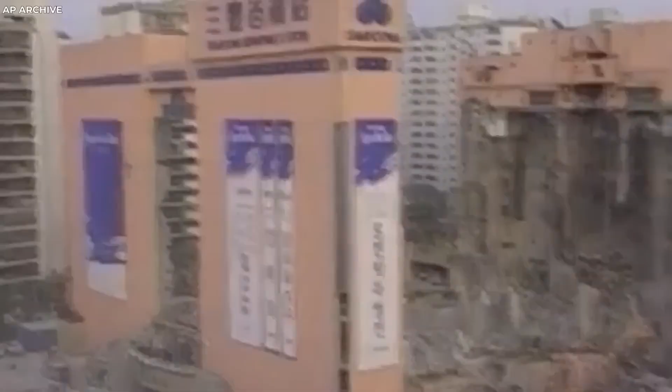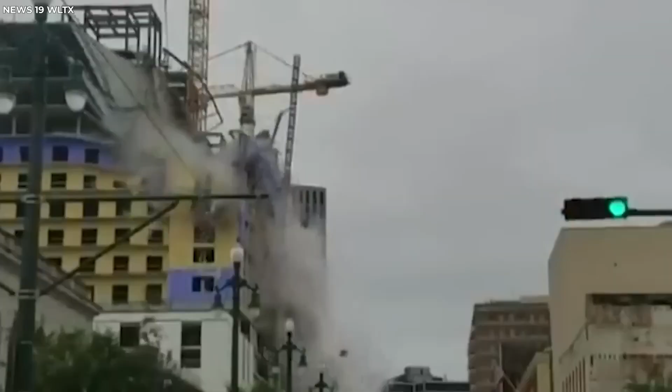What if the buildings we trust most were ticking time bombs? From luxury towers that shattered under sunlight to entire bridges and skyscrapers collapsing without warning, these aren't scenes from a disaster movie. They really happened. And they reveal the dark side of architecture's biggest mistakes. This isn't just about concrete and steel, it's about lives lost, warnings ignored, and how ambition can turn deadly. Stay with us, because these shocking real-life collapses will change the way you see the world around you.

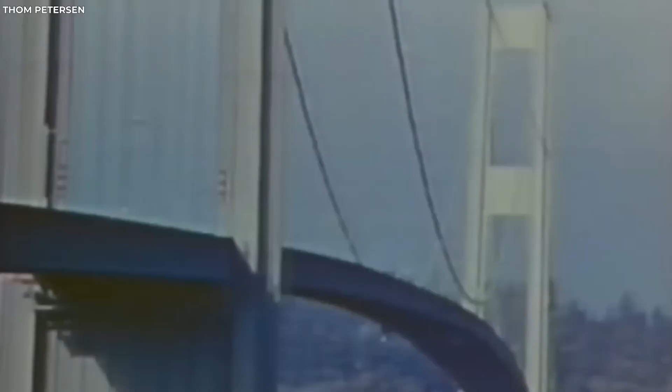It was sleek, modern, and hailed as a triumph of engineering, the Tacoma Narrows Bridge, stretching across Washington's Puget Sound. Nicknamed Galloping Gertie for its unusual bounce, the suspension bridge opened in 1940 with high hopes. Designed to be efficient and cost-effective, it was a symbol of progress. But just 4 months later, it would become something else entirely, a legend of failure.

On November 7, 1940, strong winds swept across the Sound, just 40 miles per hour. Nothing extreme. But for Gertie, it was too much. The bridge didn't just sway, it twisted, rolled, and rippled like a ribbon caught in the wind. Cars tried to cross as the deck heaved beneath them. The entire structure buckled in rhythm, as if it were alive. Then, with a violent shudder, the bridge tore itself apart and plunged into the icy water below. The world watched in disbelief.

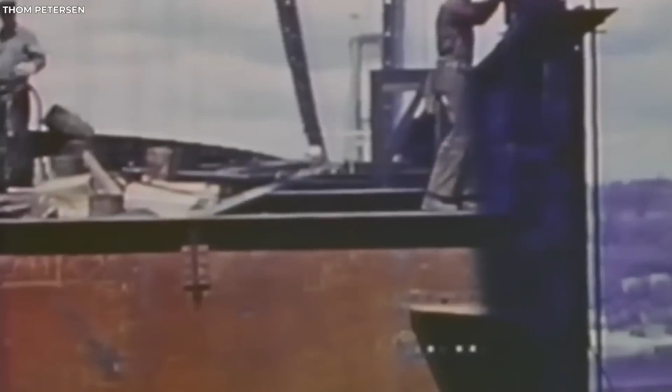The collapse wasn't caused by a storm or earthquake, it was aerodynamics. The design, though elegant, was too lightweight. Engineers had focused on sleek efficiency but hadn't accounted for how wind would interact with the long, flat deck. There were no dampers, no wind deflectors, no way to control the rising oscillations that tore the bridge apart from within. But from this failure came progress.

The disaster triggered a revolution in bridge engineering. Researchers studied wind dynamics like never before. Future suspension bridges were built with aerodynamic awareness at their core, wider decks, wind tunnels, stabilizing systems, and safety margins that didn't exist before. Galloping Gertie may have fallen, but her collapse reshaped the way we build. Because sometimes, it takes a disaster to teach us how to truly defy the forces of nature.

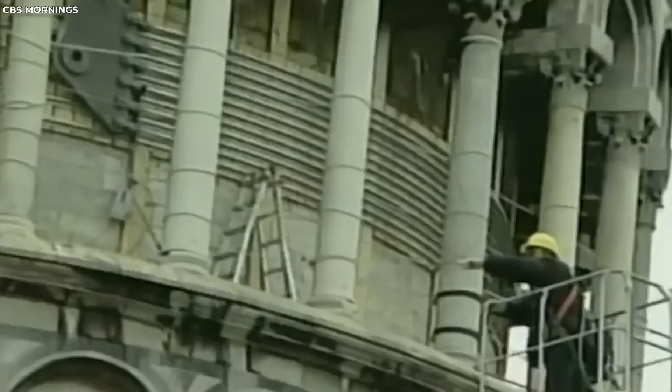It's one of the most iconic structures in the world, but also one of the biggest architectural blunders in history. The Leaning Tower of Pisa wasn't meant to lean. At first glance, it looks like a perfectly designed monument, a proud bell tower rising beside the Pisa Cathedral. But then you notice it, tilted, awkward, almost like it's mid-fall, frozen in time. And that famous tilt? It all started with a simple mistake.

Construction began in 1173, with no warning signs of disaster. But by the time workers reached the third floor, something strange happened. The ground beneath the tower, soft and unstable, started to shift. The foundation, just 3 meters deep, was far too shallow for such a heavy structure. Slowly, the tower began to lean, and there was no turning back.

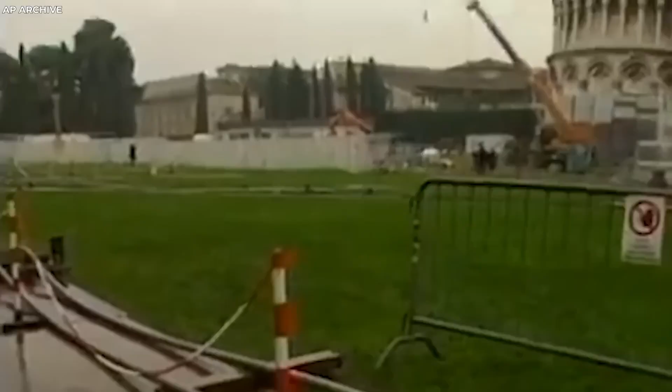Then, something unexpected, construction stopped. For nearly 100 years, due to war and political chaos, the site was abandoned. It should have been the tower's end. But instead, the long pause allowed the ground to settle. Ironically, that delay may have saved it from collapsing altogether.

When work resumed, the lean had become impossible to ignore. Yet, they kept building. By 1372, the tower was finally complete, with a permanent tilt that only grew more severe over time. Engineers tried everything over the centuries to keep it upright, but nothing seemed to work, until a major restoration began in 1993. This time, they didn't just patch it up, they stabilized the entire structure. By 2001, the lean had been reduced, and the tower finally stood on firmer ground.

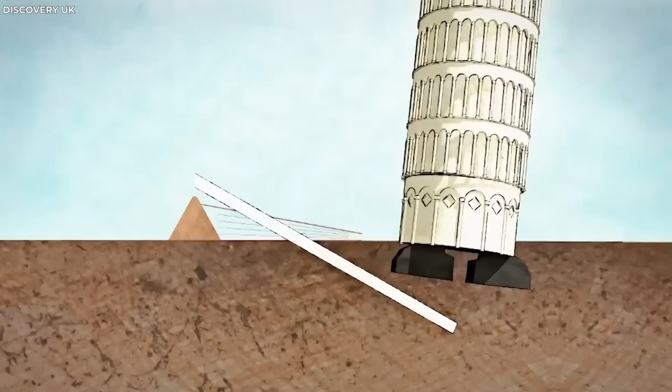But here's where things take a darker turn. Not long ago in China, a beautifully designed scenic archway suddenly collapsed. It wasn't meant to be climbed, but people did it anyway. That day, the structure gave way, sending over 100 people plunging down in a terrifying moment of chaos. The full scope of the disaster is still unknown. But the warning is clear: even the most peaceful-looking structures can turn deadly when their limits are ignored.

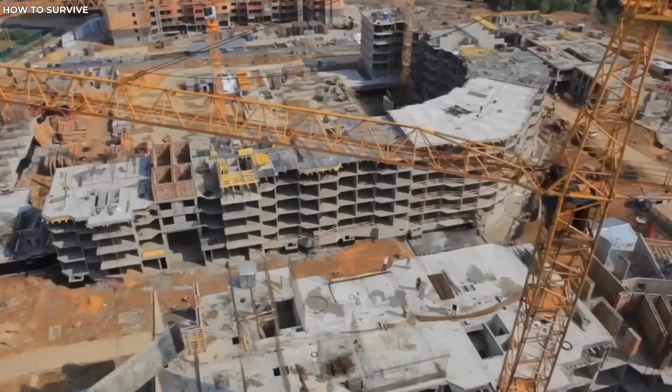It was meant to be a night of music, laughter, and celebration. But on July 17, 1981, inside the gleaming Hyatt Regency Hotel in Kansas City, joy turned into horror in a matter of seconds. The hotel's stunning atrium, with its glass ceilings and hanging walkways, was the pride of the building. The suspended bridges connected the second and fourth floors, hovering above a grand lobby filled with hundreds of guests enjoying a Friday night dance. Then, without warning, the unthinkable happened.

Both walkways suddenly broke loose and crashed onto the crowd below.

In an instant, metal and concrete rained down. The music stopped. Screams echoed. Bodies were buried. When the dust settled, 114 people were dead. Over 200 were injured. It became one of the deadliest structural collapses in American history, and it didn't happen because of an earthquake or a storm. It happened because of one small design change.

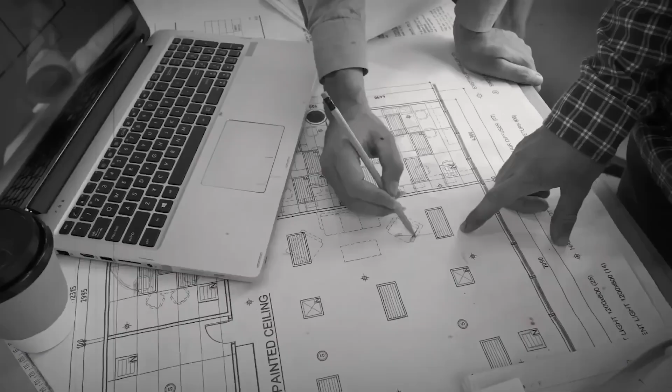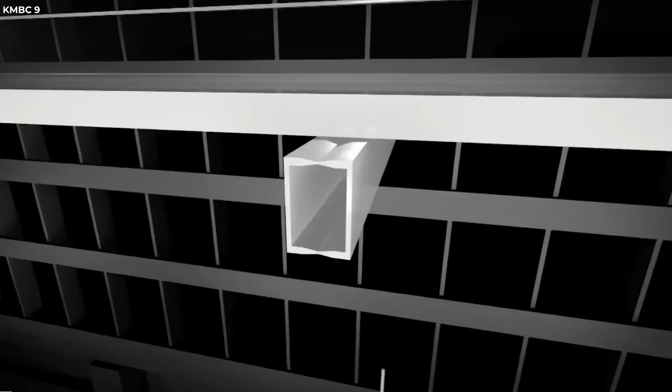Originally, engineers planned to hang both walkways from a single set of support rods anchored to the ceiling. But during construction, that plan was quietly altered. Instead, each walkway got its own set of rods, one hanging from the other. It seemed like a harmless adjustment, until physics stepped in.

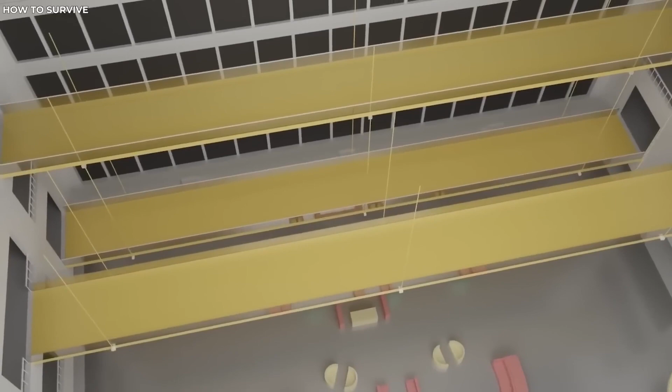That change doubled the stress at the critical joints holding the upper walkway. And those joints weren't built to handle it. The load became too much. The connections snapped, and with them, so did everything beneath.

It wasn't just a tragic accident, it was a devastating lesson in engineering responsibility. One slight change, one overlooked calculation, and over 100 lives were lost in moments. The Hyatt Regency collapse remains a painful reminder that behind every structure, there's a choice between safety and shortcuts. The question is, how many other buildings are one decision away from disaster?

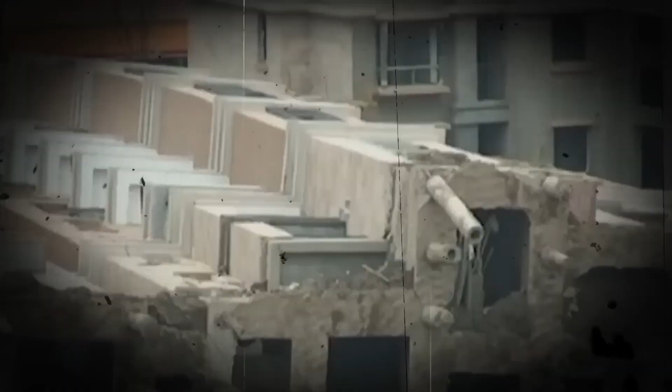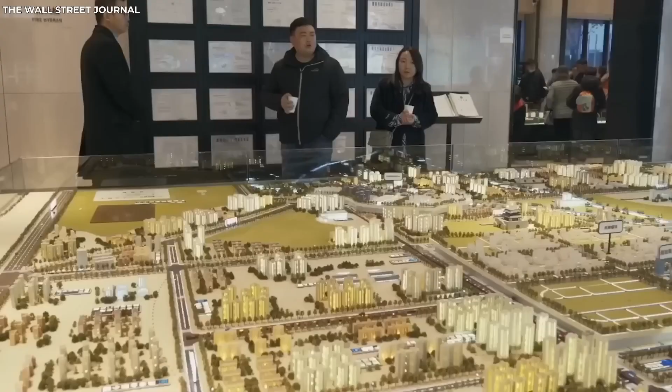It was supposed to be a shining symbol of Shanghai's modern future. Instead, it became one of the most surreal construction disasters the world has ever seen. In 2009, a high-rise in the Lotus Riverside complex didn't crack, explode, or vanish. It simply tipped over, like a fallen tree. One moment it stood tall, the next it was lying on its side, intact but defeated, as if someone had knocked over a toy block.

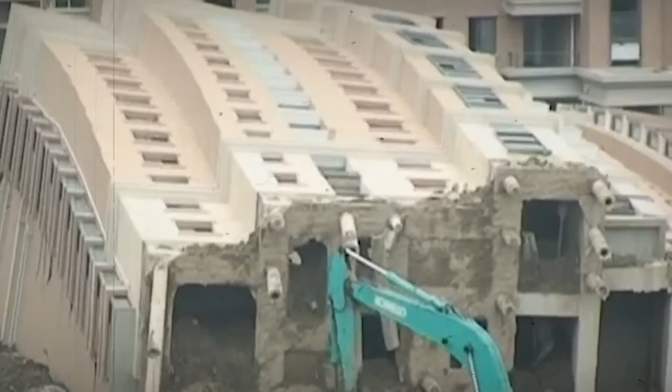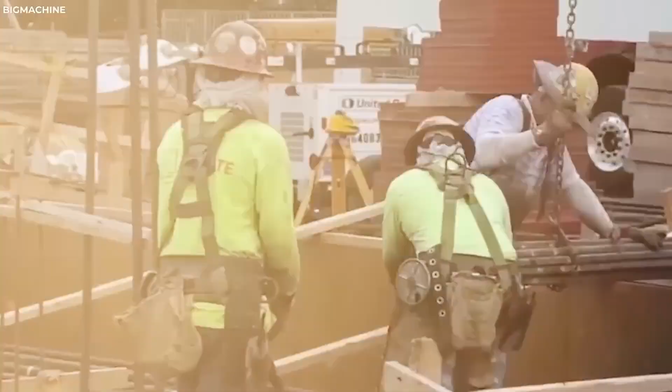This wasn't the result of an earthquake or any natural disaster. The sky was clear, the ground was still. But beneath the surface, something had gone terribly wrong. It all started with the construction of an underground parking garage beneath the building. To make space, crews removed massive amounts of soil that was already unstable. Piece by piece, they unknowingly pulled away the earth holding the building upright.

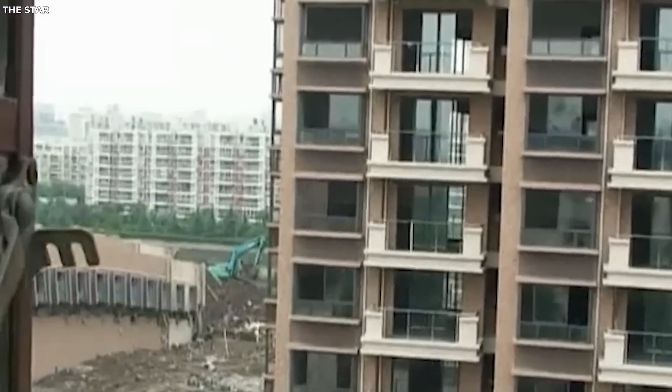And then came the rain. Heavy storms drenched the exposed ground, turning it into a soft, shifting mass. The foundation couldn't handle the pressure. Slowly, the structure began to lean, until gravity took over. The entire building toppled sideways, but didn't collapse into rubble. It remained almost eerily whole, a ghostly reminder of what should have never happened.

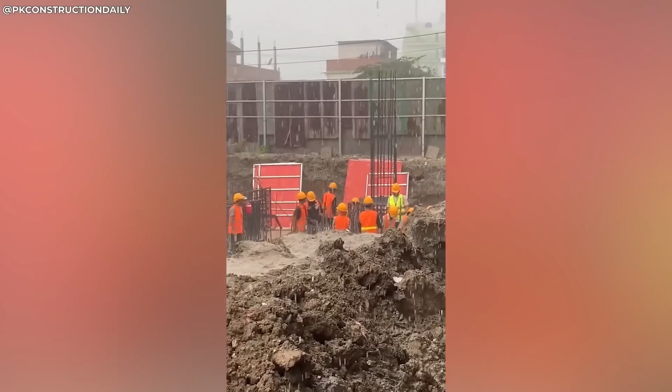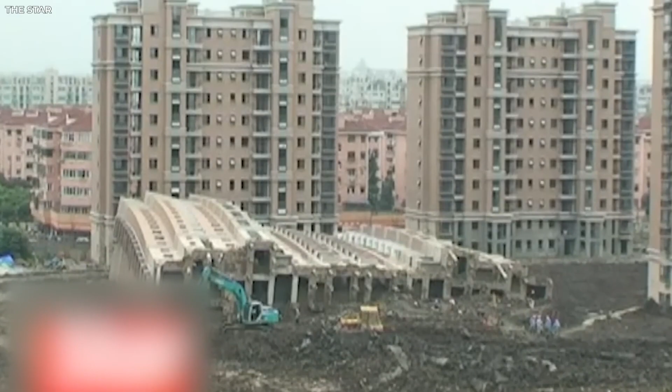Photos of the fallen tower shocked the world. This wasn't just a construction failure, it was a warning. A warning that rapid urban expansion comes with real risks. That shortcuts in design, rushed excavation, and ignoring ground stability can turn luxury dreams into engineering nightmares. In a city racing toward the future, the Lotus Riverside collapse was a hard reminder of what happens when we forget the ground we're building on.

Are we learning from these mistakes, or just waiting for the next fall?

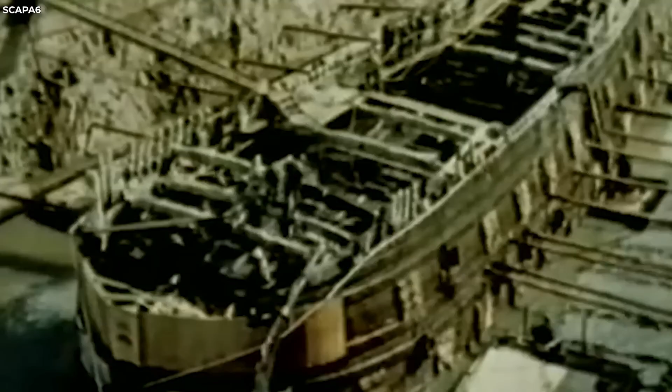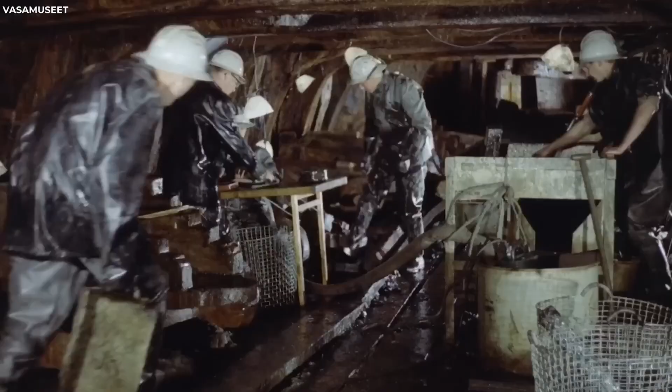It was meant to be a floating fortress, a towering symbol of Sweden's rising power. Commissioned by King Gustavus Adolphus in 1628, the Vasa warship was built to strike fear into enemies and awe into allies. With dozens of cannons and intricate carvings, it was more than a war machine, it was a statement. Bold, majestic, unstoppable. But on its maiden voyage, just minutes after leaving Stockholm's harbor, the unthinkable happened.

The Vasa tilted, then tipped, and then vanished beneath the waves, all within 1,300 meters of launch. No enemy fire, no storm, just silence, followed by chaos. Dozens of sailors went down with the ship. And one of the grandest vessels ever built became one of history's most embarrassing failures.

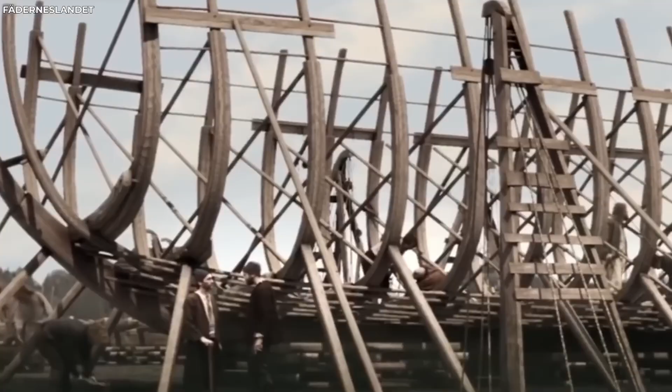So what went wrong? At its core, the Vasa was doomed by a simple design flaw. It was too top-heavy. The ship's upper decks were overloaded with cannons and decorative features, while its lower hull lacked enough ballast to stabilize the weight. Even a moderate gust of wind was enough to push the ship past its tipping point.

The signs were there, but ignored. Engineers and officials, eager to please the king, focused on size, firepower, and glory, not balance, structure, or safety. And the price for that ambition was paid almost instantly.

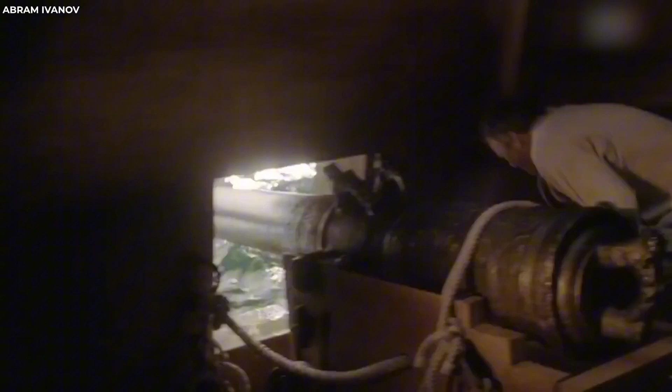For over 300 years, the wreck lay hidden beneath Stockholm's waters, a sunken relic of pride gone unchecked. But in 1961, the Vasa was raised, remarkably intact, and placed on display for the world to see. Not as a monument of victory, but as a warning. A warning that no amount of power or beauty can defy physics. That ignoring basic engineering for the sake of grandeur can turn a nation's pride into its most haunting lesson.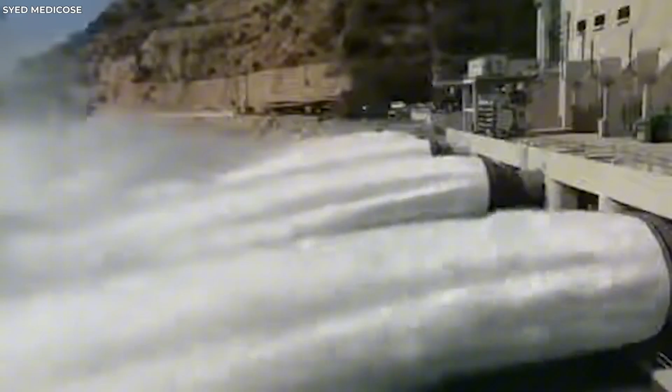It was supposed to be a triumph of modern engineering, a massive wall of earth and rock built to tame nature and serve the people of Idaho.

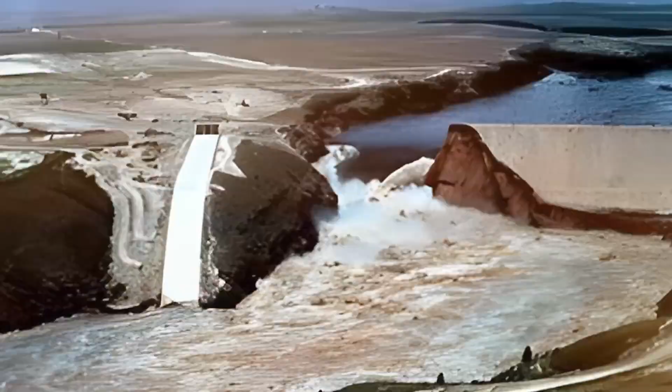The Teton Dam, completed in the 1970s, promised flood control, irrigation, and a stable water supply for the region. Built with compacted layers of soil and stone, it stood tall and confident, a symbol of progress in the American West. But on June 5, 1976, that symbol shattered.

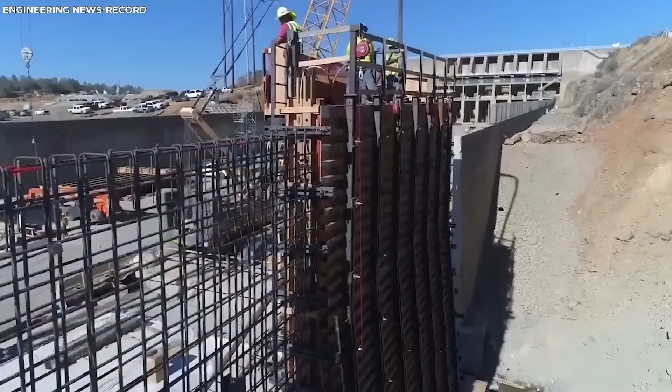It started quietly. As the reservoir behind the dam reached full capacity for the first time, small leaks began to appear. Nothing too alarming, at first. Crews rushed to patch them, believing the situation was under control. But the water kept seeping. The dam kept weakening. And by the time anyone realized how bad it was, it was already too late.

The dam broke open in a violent roar, releasing over 250,000 acre-feet of water in a matter of hours. A wall of destruction rushed downstream, swallowing everything in its path. The towns of Wilford and Rexburg were hit hardest. Homes ripped from their foundations. Roads, farms, bridges, gone. The flood killed 11 people, left thousands homeless, and caused billions in damage.

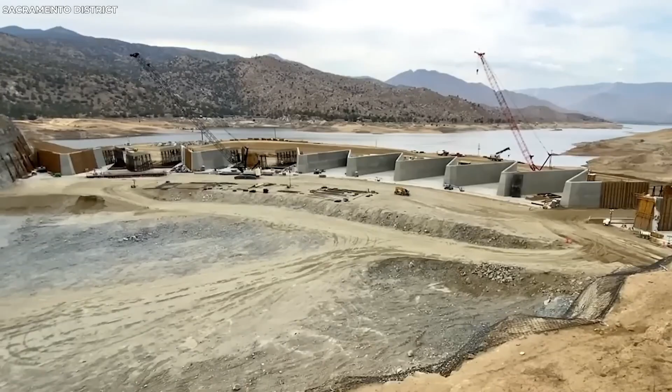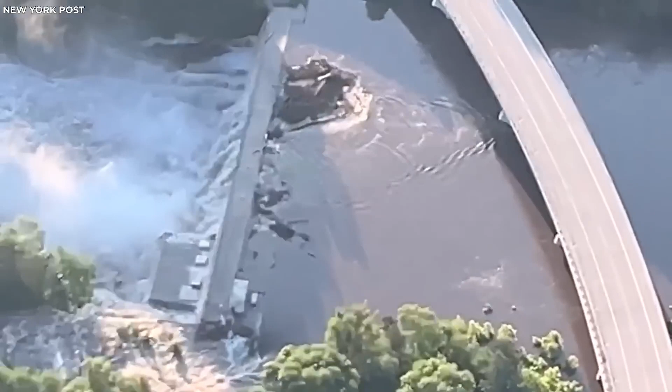And it all could have been prevented. The core failure lay deep within the dam itself. It had been built with porous volcanic rock, material that allowed water to seep through unnoticed. Over time, that hidden flow carved paths through the dam's structure, undermining its stability from within. Add to that a lack of proper oversight and rushed construction practices, and the result was inevitable.

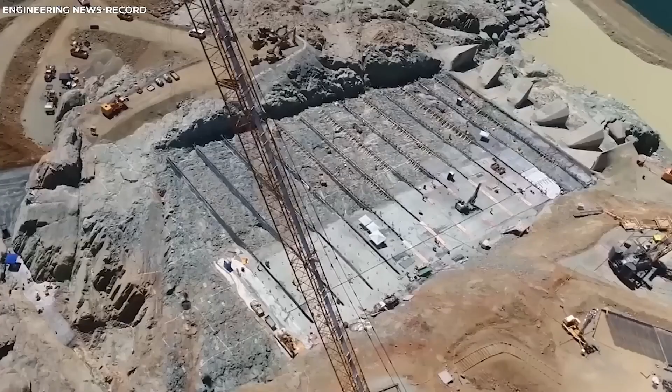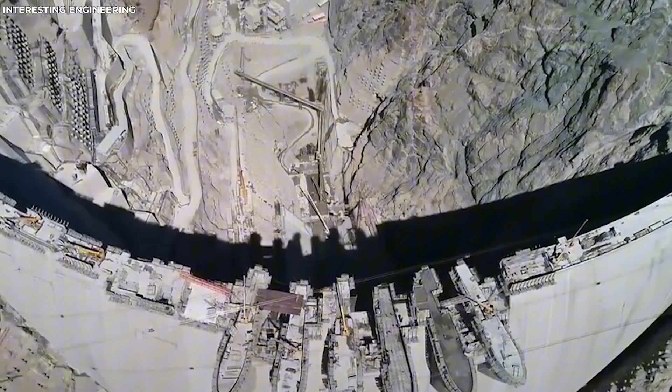The Teton Dam was meant to protect. Instead, it became a haunting reminder of what happens when ambition outpaces caution. A structure built to hold nature back, undone by water quietly slipping through the cracks. Sometimes, the most devastating failures aren't sudden. They're silent, until they're not.

It was once the shimmering heart of Berlin's Radisson Blu Hotel, a towering, liquid column filled with life. The AquaDom. An 82-foot-tall masterpiece of engineering, wrapped in clear acrylic and teeming with 1,500 tropical fish. Visitors rode in elevators straight through its core, surrounded by a living, swirling ocean.

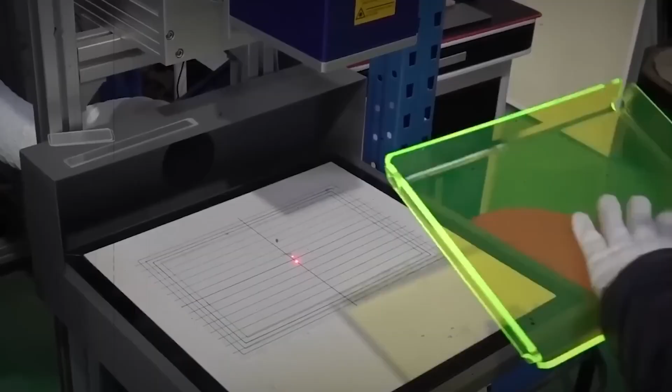It wasn't just an aquarium, it was a wonder. A symbol of modern design. A snapshot of nature suspended in glass. But in December 2022, that wonder turned into catastrophe. Without warning, the massive tank exploded. Millions of liters of water surged through the hotel lobby, smashing walls, flooding streets, and leaving behind a scene of chaos and destruction. Fish were flung across the floor. Entire sections of the hotel were left in ruins.

And the cause? Not terrorism. Not an earthquake. Not sabotage. Just time, and cracks too small to see. The tank's acrylic walls had slowly developed microfractures, tiny weaknesses born from years of pressure, subtle temperature shifts, and the relentless weight of the water. No alarms. No warning signs. But beneath the surface, the damage was building.

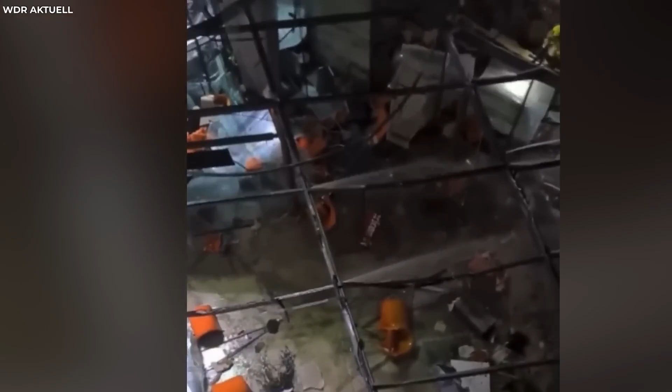Until one day, the material gave out, and the entire tank failed in an instant. The collapse didn't just take the lives of hundreds of fish. It caused millions in damage and exposed a deeper fear that even the most beautiful designs can hide fatal flaws. The AquaDom was a technological marvel, but in the end, it became a lesson in how ambition must be matched with caution. Because when you're building something that defies nature, you have to ask, how long before nature takes it back?

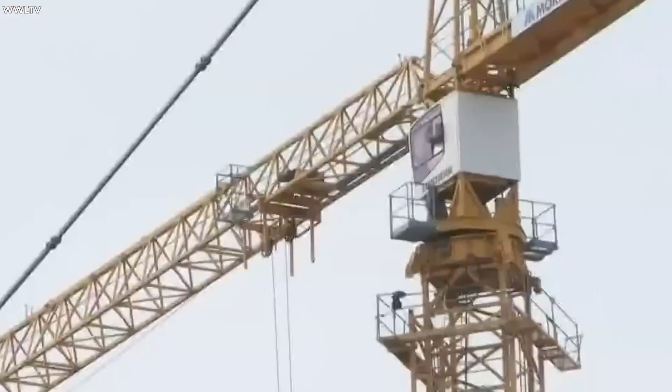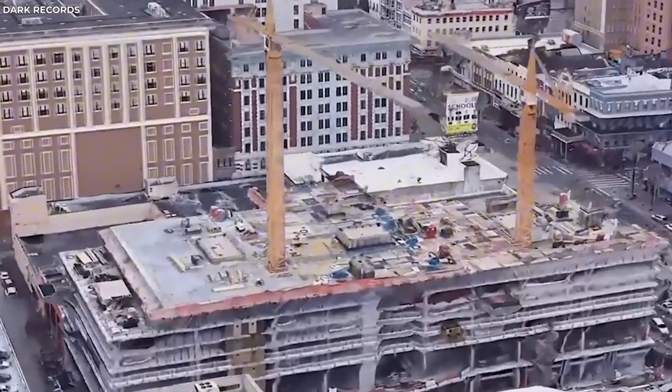It was meant to be a crown jewel in New Orleans' skyline, a sleek new Hard Rock hotel with rooftop views, luxury finishes, and bold ambition. Construction began in 2018, and as the opening date approached, anticipation soared. But on the morning of October 12, 2019, excitement turned to horror.

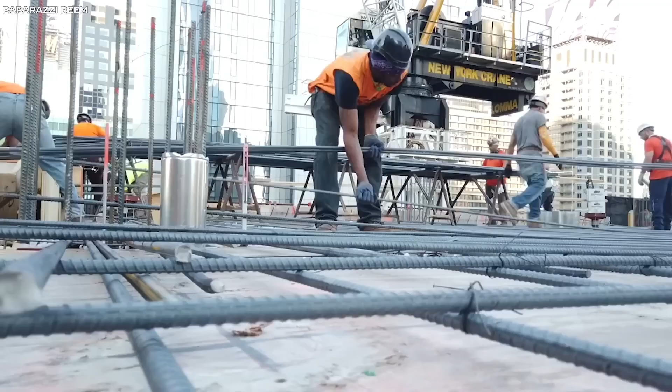Without warning, the upper floors of the building collapsed. A roar of twisting steel and shattering concrete echoed through downtown. Three workers were killed. Dozens more scrambled for their lives amid falling debris. Dust and chaos swallowed the site as the unthinkable unfolded in real time.

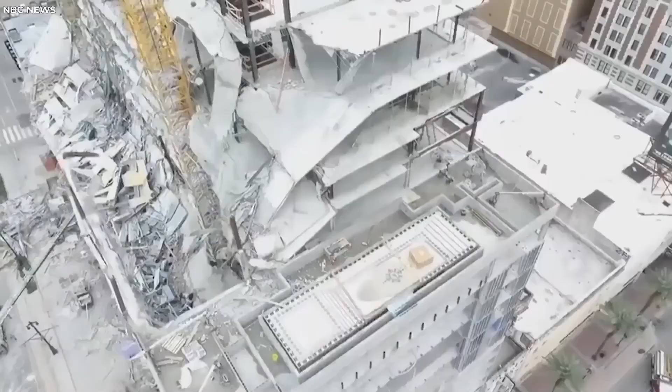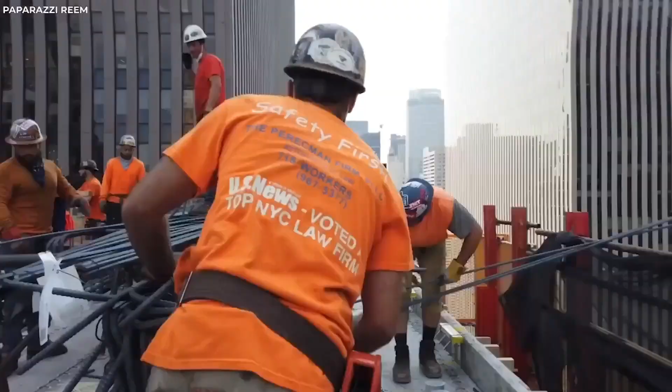And the cause? A devastating mix of design risk and cost-cutting. At the heart of the failure were steel beams on the 16th and 17th floors, beams that had been intentionally thinned to allow for higher ceilings. But thinner meant weaker. And those beams, never built to hold such massive weight, buckled under pressure. As the structure rose, the load above became too much. The beams gave way, and everything came crashing down.

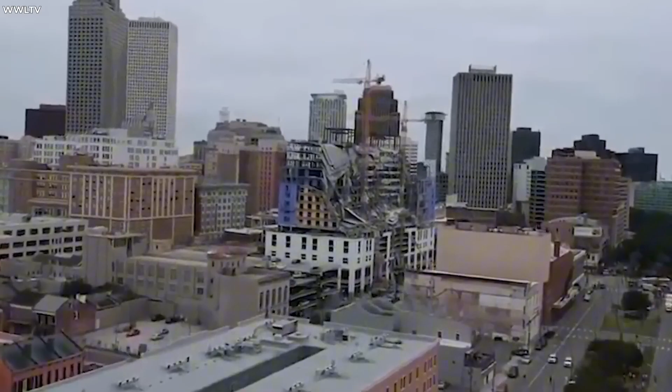But the problems didn't end there. Investigators soon uncovered deeper flaws: lax oversight, safety shortcuts, and warnings ignored. Some workers had even voiced concerns before the collapse. But in the rush to save money and meet deadlines, corners were cut, and risks were buried.

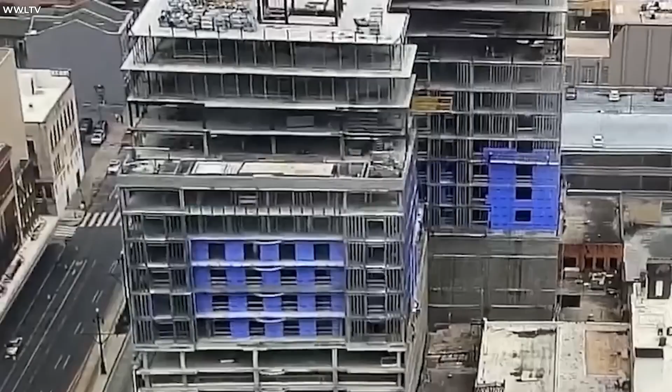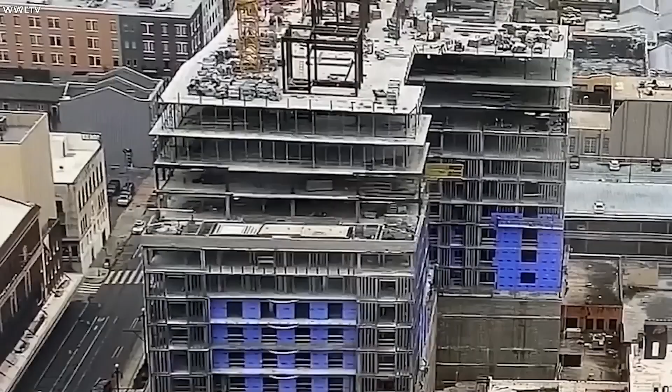The collapse didn't just destroy a building. It exposed a dangerous truth in modern construction: when profit outranks safety, lives are put on the line. The Hard Rock disaster became a wake-up call, forcing cities, contractors, and regulators to re-examine what's really holding our buildings up. Because a structure can rise fast, shine bright, and still be one beam away from tragedy.

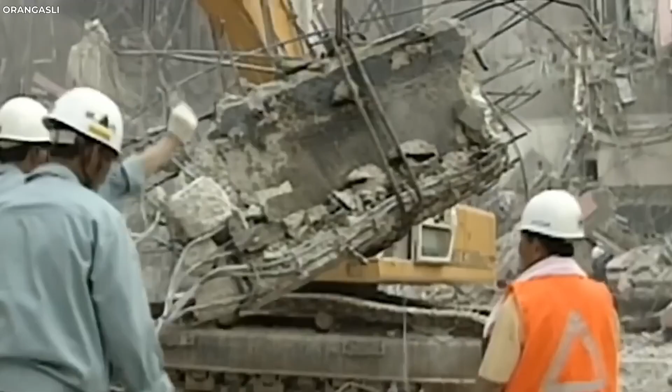In the heart of Seoul, a shining symbol of South Korea's booming economy stood tall, the Sampoong department store. Opened in the late 1980s, it was a glittering 5-story retail paradise meant to showcase wealth, ambition, and the country's meteoric rise. But behind the polished walls and luxury storefronts, a hidden danger was growing.

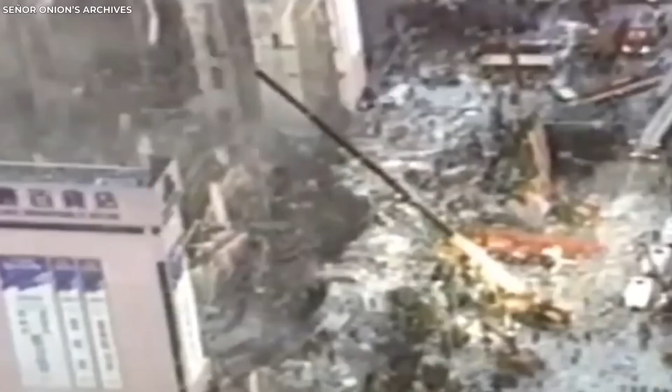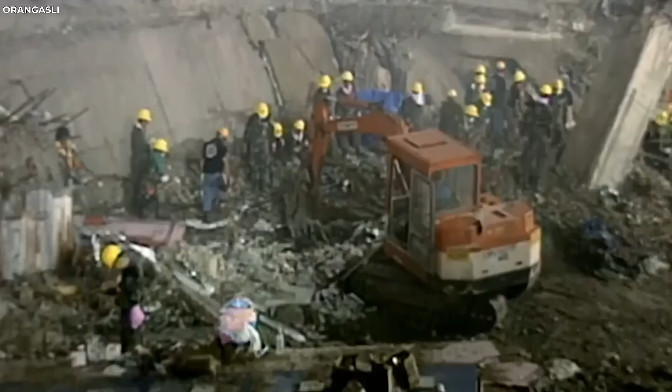Because the Sampoong building wasn't supposed to be a department store at all. It was originally designed as a 4-story office block. But mid-construction, that plan was scrapped. The developers wanted more space, more floors, more profit. So the structure was modified on the fly. A 5th floor was added. Support columns were removed to make room for escalators and open areas. And a massive air conditioning unit was placed on the roof, pushing weight far beyond what the foundation was meant to carry.

Cracks started to form. Floors began to shift. The building groaned under its own weight. And yet, the signs were ignored. Warnings were silenced. Repairs were avoided. Business continued as usual. Until June 29, 1995.

Without warning, the entire structure gave way. Floor by floor, the building collapsed in a crushing wave of concrete and steel. Over 500 lives were lost. Nearly 1,000 more were injured. In seconds, a monument to success became a graveyard of greed.

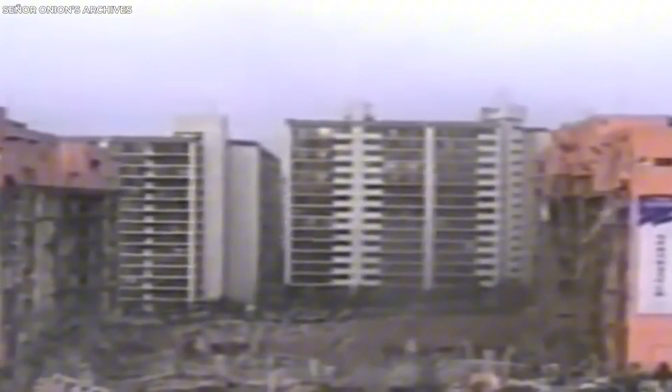Investigations uncovered a chilling truth. The disaster wasn't just an accident, it was the direct result of corner cutting, corruption, and a blatant disregard for safety. The pursuit of profit had overridden the principles of engineering. And innocent people paid the price. The collapse of the Sampoong department store became one of the deadliest peacetime building disasters in history. A tragic reminder that when structural integrity is sacrificed for speed or savings, collapse isn't a question of if, it's only a matter of when.

It was meant to be a symbol of elegance, Chicago's Aon Center, once the tallest building in the city, wrapped from top to bottom in pristine Italian Carrara marble. Completed in 1973, the skyscraper gleamed like a monument to modern luxury.

But beneath the beauty, a quiet disaster was unfolding. Within just a year, cracks began to appear. Chicago's weather, with its brutal winters and scorching summers, put the marble under relentless stress. The slabs expanded and contracted with every temperature swing. And Carrara marble, while beautiful, wasn't built for that kind of punishment.

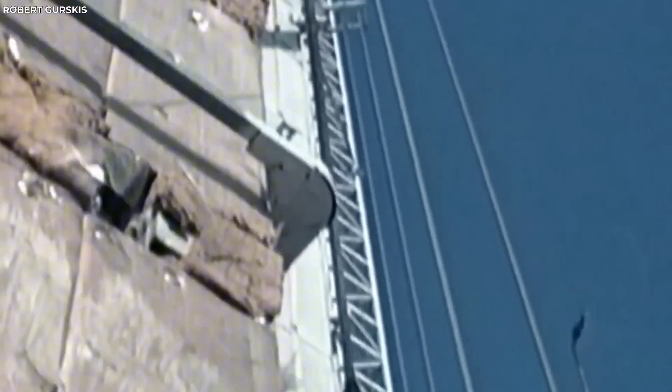Soon, pieces of the facade began to loosen. And then, they started to fall. Some panels, weighing over 300 pounds, crashed to the ground below, turning a marvel of design into a hazard for anyone walking near it. Attempts were made to reinforce the stone, but the damage was already too deep.

By the 1990s, engineers faced the hard truth: the entire exterior had to be replaced. Carrara marble was ripped away, and stronger, weather-resistant Mount Airy granite took its place. The fix cost $80 million, more than half the original price of the entire building.

The Aon Center's marble crisis became a cautionary tale in architectural history. It taught the world that even the most luxurious materials can fail if they're not built for the environment they're placed in. That no matter how beautiful a building looks, strength and safety must come first. Because when form ignores function, even a masterpiece can crumble.

It was designed to stand out, a bold, curving skyscraper rising above London's financial district. The 20 Fenchurch Street Tower, better known as the Walkie-Talkie, wasn't just another glass building. Its unique concave shape gave it character, made it iconic. But in 2013, that same design turned it into something else entirely, a solar weapon.

Because what no one anticipated was how the building's glass facade would interact with the sun. The curved surface worked like a giant magnifying glass, concentrating sunlight into powerful beams aimed directly at the street below. It didn't just warm things up, it cooked them. The reflected rays melted parts of a parked Jaguar. Shop signs began to warp. Tiles cracked. The pavement sizzled under temperatures reaching a scorching 204 degrees Fahrenheit.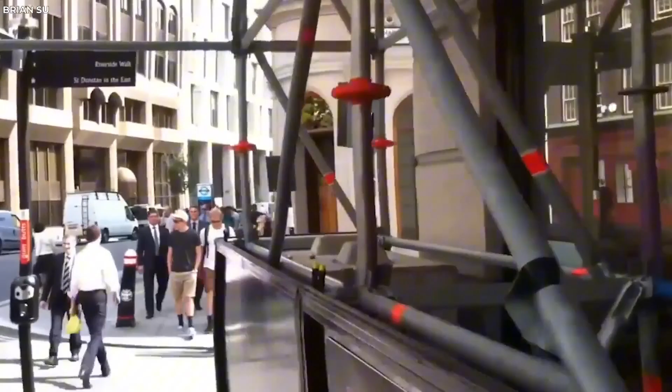And emergency fixes had to be rushed in. Special sunshades were installed to scatter the light, deflecting the heat away from the ground. But the damage was already done. What was meant to be a masterpiece of modern architecture had become a lesson in unintended consequences. A reminder that a beautiful design on paper can behave very differently in the real world. And when physics meets ambition, even a harmless-looking building can burn.

Sometimes, the most dangerous flaw isn't in what we build, but in what we fail to see.